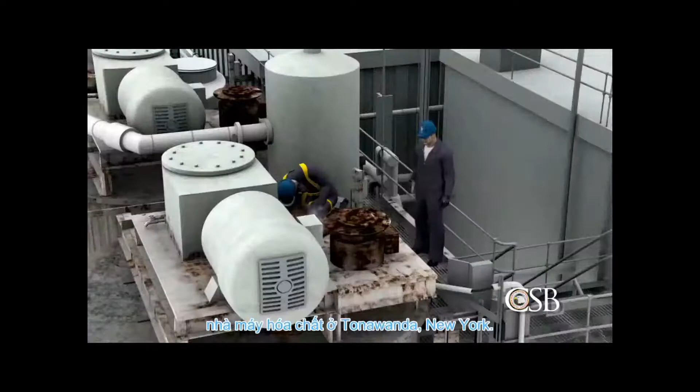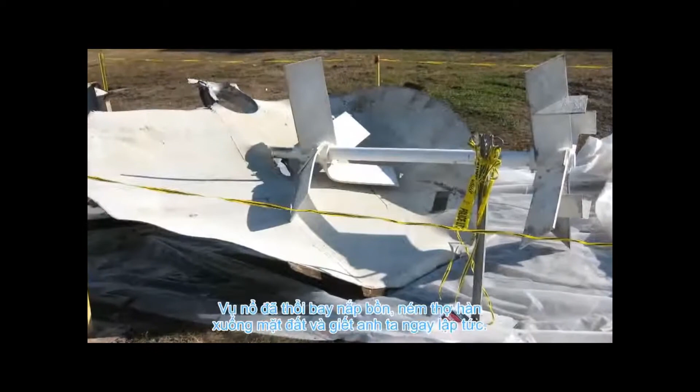On November 9, 2010, a powerful explosion shook the DuPont chemical manufacturing plant in Tonawanda, New York, a suburb of Buffalo. A contract welder was performing maintenance work on a tank that, unknown to him, contained flammable gas. The explosion blew the top off the tank, throwing the welder to the ground and killing him instantly. A second contract worker was burned.

The tragic explosion at the DuPont facility exposed weaknesses in how process hazards were analyzed and controlled. The result was the death of a welder in a preventable hot work accident.

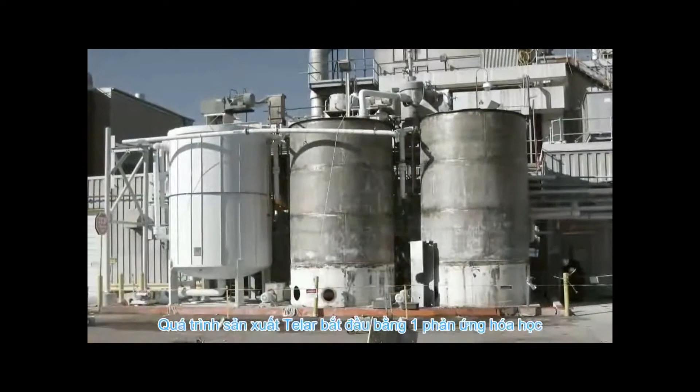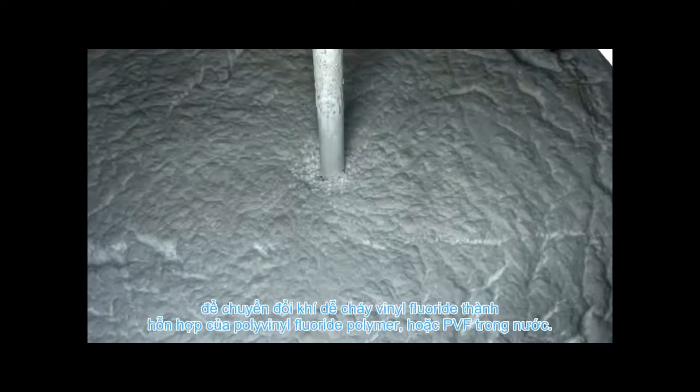DuPont's Tonawanda facility manufactures a polymer known as Tedlar, used in solar panels, and Corian for use in countertops. The process of producing Tedlar began with a chemical reaction to convert flammable vinyl fluoride gas into a slurry of polyvinyl fluoride polymer, or PVF, in water. The PVF slurry then passed through separators.

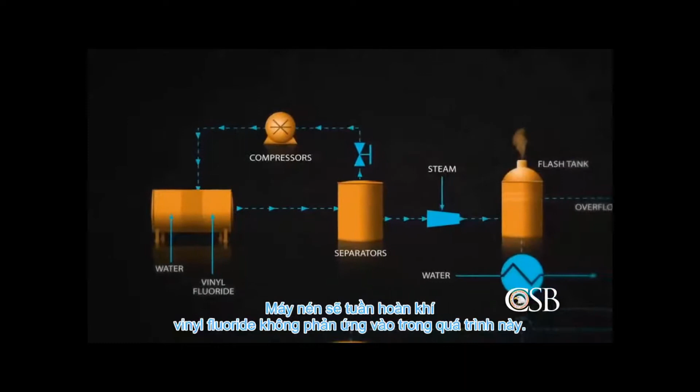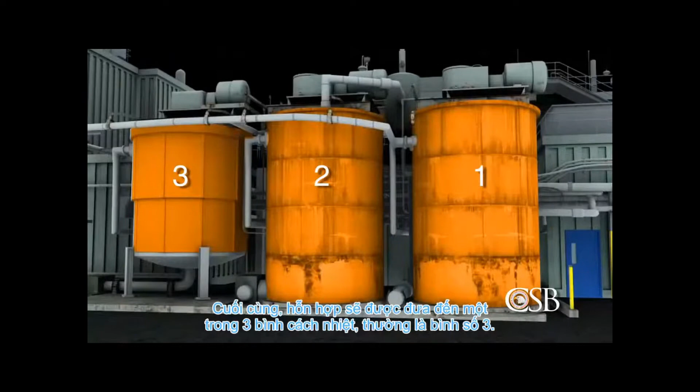Compressors recycled unreacted vinyl fluoride gas into the process, while a small flash tank released residual vinyl fluoride into the atmosphere. Finally, the slurry was transferred to one of 3 insulated holding tanks, usually tank number 3. Tanks 1 and 2 were reserved for slurry overflow. Tank 1 normally remained empty.

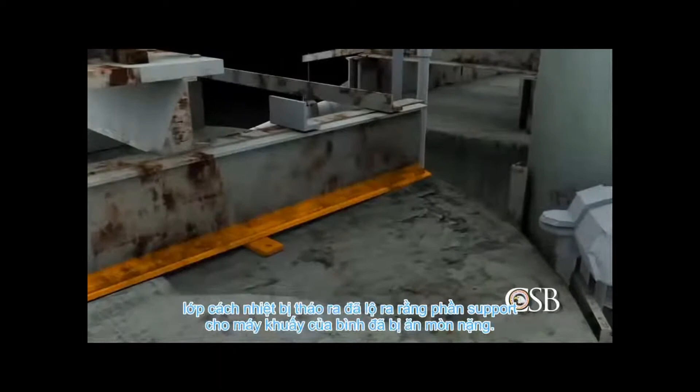On October 22, 2010, the Tedlar process underwent a planned shutdown, during which workers removed the asbestos insulation on tanks 1 and 2. Removing the insulation revealed that the agitator supports for the tanks were heavily corroded. DuPont directed contractors to repair the supports, which would involve welding and grinding on tanks 1 and 2.

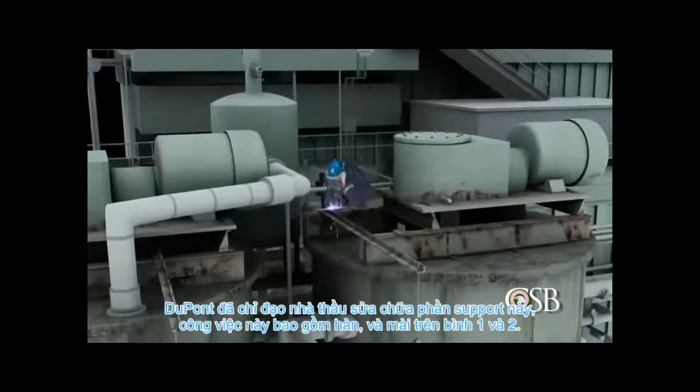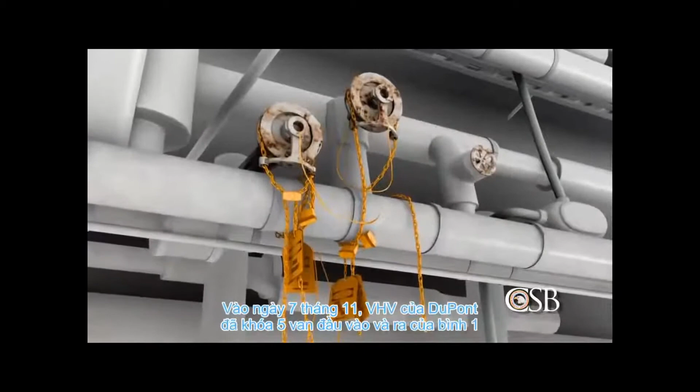The hot work on tank 2 occurred during the shutdown without incident, but the repairs on tank 1 were delayed while parts were ordered. DuPont personnel determined that it would be safe to perform hot work on tank 1 after the restart. On November 7th, DuPont operators locked all 5 valves leading to and from tank 1 in the closed position in order to stop potential slurry flow. The tank's agitator motor was also locked out.

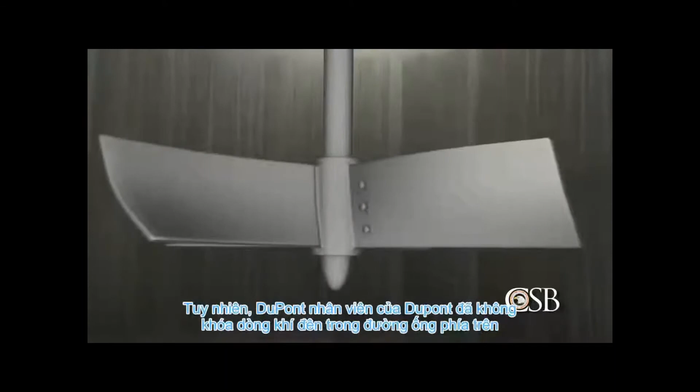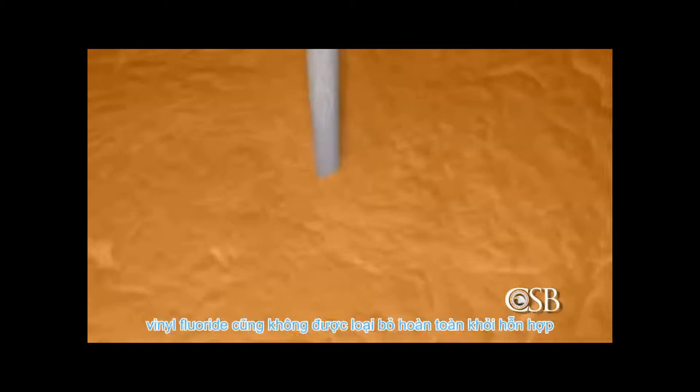However, DuPont personnel did not block the flow of gas inside the overhead piping, or overflow line, that connected the vapor space of all 3 tanks. They mistakenly believed that flammable vinyl fluoride gas could not reach any of the slurry tanks. But the CSB investigation found that even in normal operations, vinyl fluoride was not completely removed from the slurry and was always present in the slurry tanks in varying amounts.

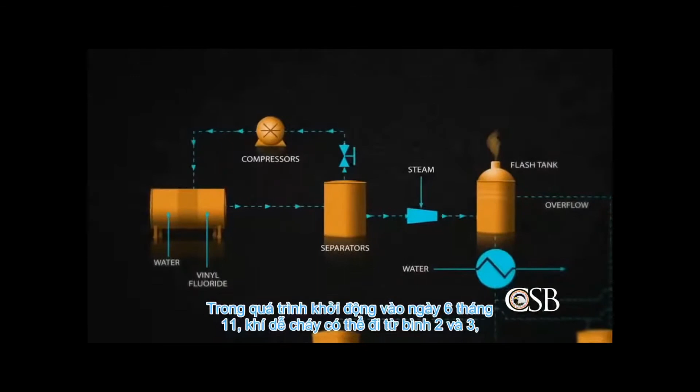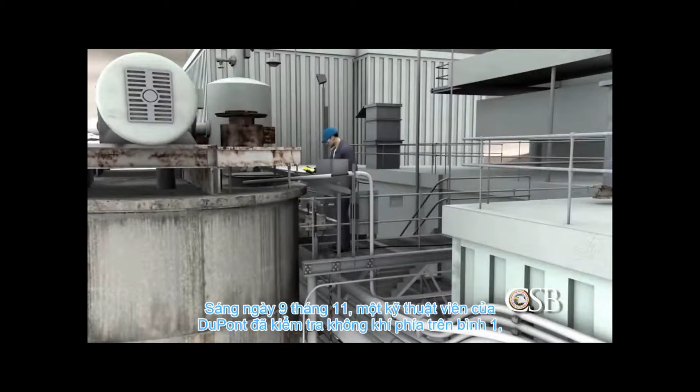When the process restarted on November 6th, the flammable gas was able to travel from tanks 2 and 3 through the open overflow line into tank 1. On the morning of November 9th, a DuPont technician tested the atmosphere above tank 1, where welding would later take place. There were also 2 continuous air monitors in the vicinity. No flammable gas was detected, and the hot work was cleared to begin.

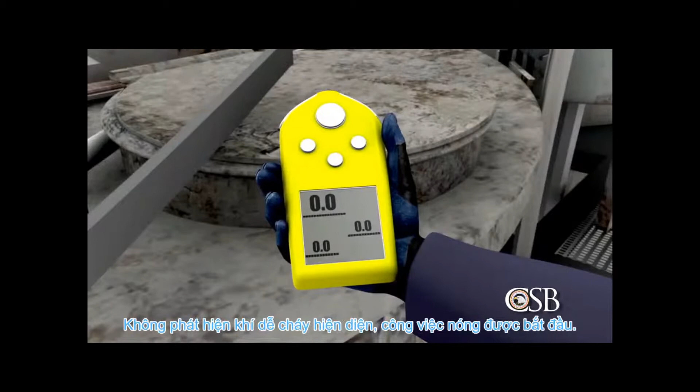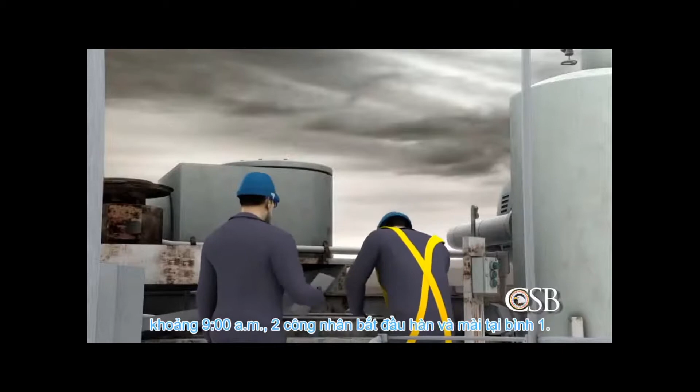But no testing was done to measure or monitor the atmosphere inside the tanks, where, unknown to the contractors, the flammable gas was at dangerous levels. Around 9 a.m., 2 contract workers began welding and grinding on tank 1. The welder connected his safety harness to the tank's agitator support and worked on top of the tank as the foreman looked on from the nearby catwalk.

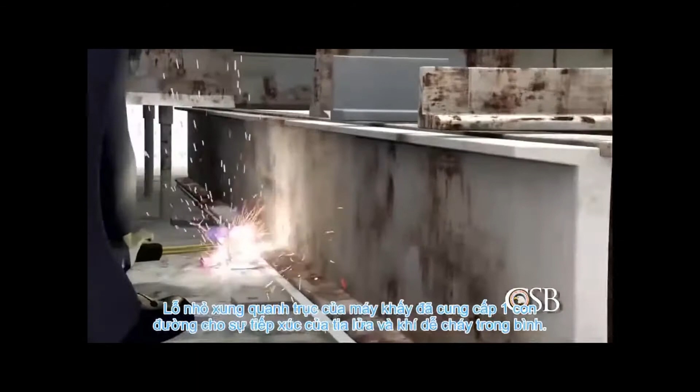At approximately 11 a.m., the welder was repairing corroded portions of the agitator support beams directly above the flammable gas. A hole around the agitator shaft may have provided a pathway for ignition. Welding sparks could fall into the tank, even as flammable gas might drift upward toward the sparks. The ignition of the vinyl fluoride caused a powerful explosion.

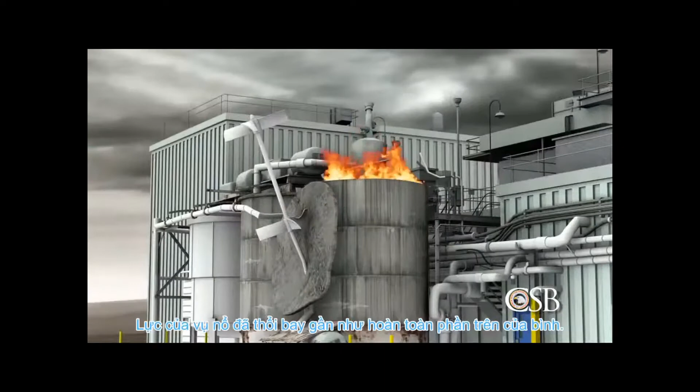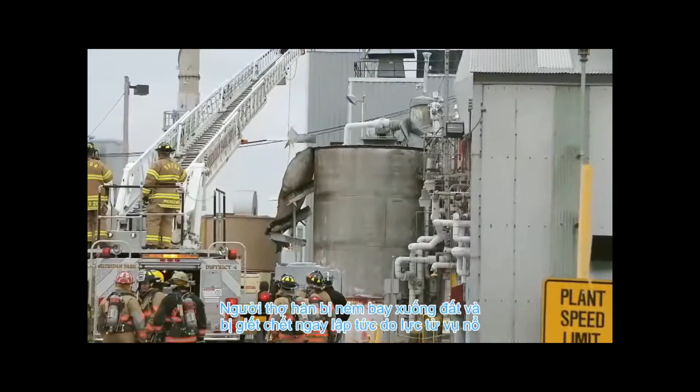The force of the blast blew the top of the tank almost completely off. A flash fire erupted that consumed the flammable gas and quickly burned out. The welder was thrown to the ground, killed instantly from blunt force trauma. The foreman's face and arms were burned.

Mark Wingard was a member of the CSB team that investigated the accident at DuPont. Had DuPont technicians tested Tank 1 for a flammable atmosphere, they would have known that any hot work presented a serious explosion hazard. But plant engineers did not realize that significant amounts of flammable gas could be present in the slurry tanks, and the testing was never done.

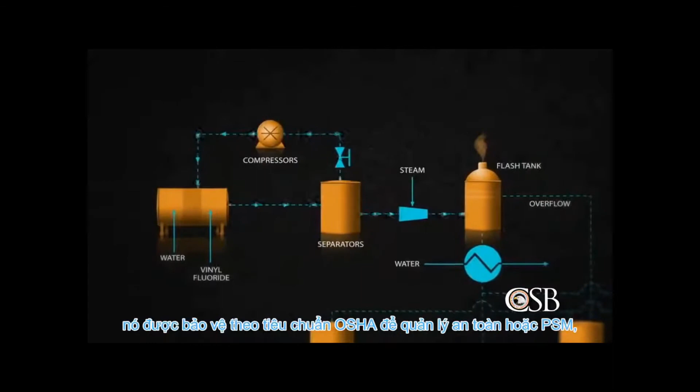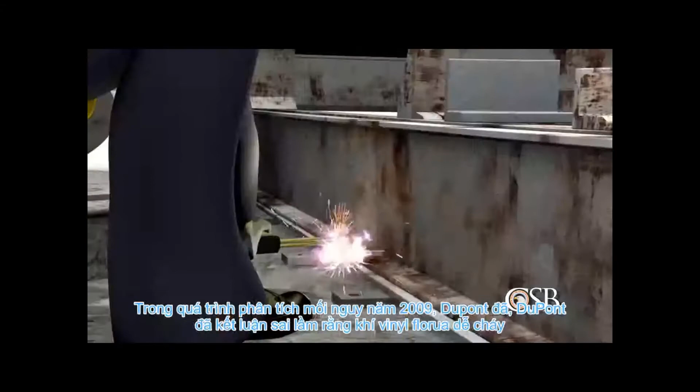DuPont regarded most of the Tedlar production process as covered under the OSHA Standard for Process Safety Management, or PSM, and therefore subject to stricter operating and maintenance requirements. But DuPont personnel did not include the slurry tanks in the facility's PSM program. In a 2009 process hazard analysis, DuPont erroneously concluded that flammable vinyl fluoride gas could never reach the tanks in dangerous quantities.

We found that the contractors did obtain hot work permits for welding on Tank 1, but those permits were authorized by DuPont employees who were unfamiliar with the specific hazards of the process, and the permits did not require testing the atmosphere inside the tanks.

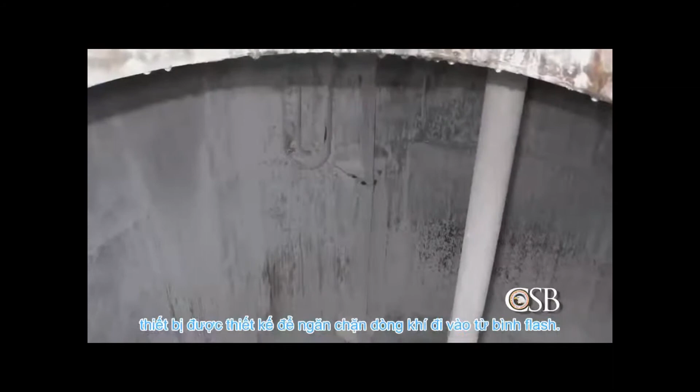Two additional factors may have contributed to the tragedy. Prior to the explosion, DuPont personnel had discovered that slurry tank number 2 had a hole in a liquid trap, which was designed to prevent the flow of gas from the flash tank. Without a liquid seal in the trap, there was an additional pathway for vinyl fluoride gas to flow into the tanks.

However, this hazard went unrecognized, and DuPont engineers concluded that it would be safe to return the tank to service. No formal management of change review was conducted.

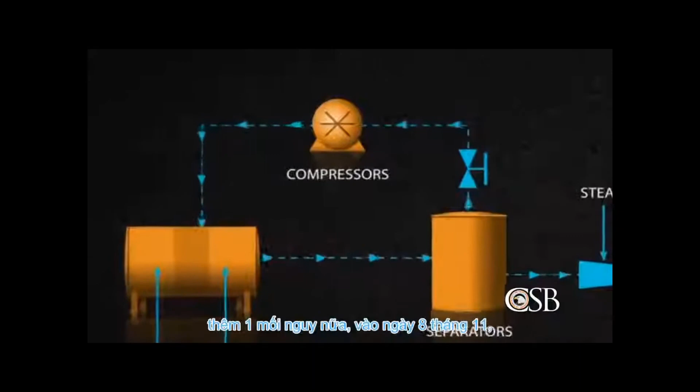Further adding to the danger, on November 8th, there was a malfunction in a compressor used to strip vinyl fluoride gas from the PVF slurry. As a result, the slurry contained more than the normal amount of vinyl fluoride. Once again, DuPont personnel did not formally analyze the safety impact of continuing to operate with a malfunctioning compressor.

In its final report, the CSB recommended that DuPont revise its corporate policies to require atmospheric monitoring inside tanks before and during any hot work. And the board recommended that DuPont require all process piping, including vent lines on tanks, to be positively isolated before authorizing any hot work.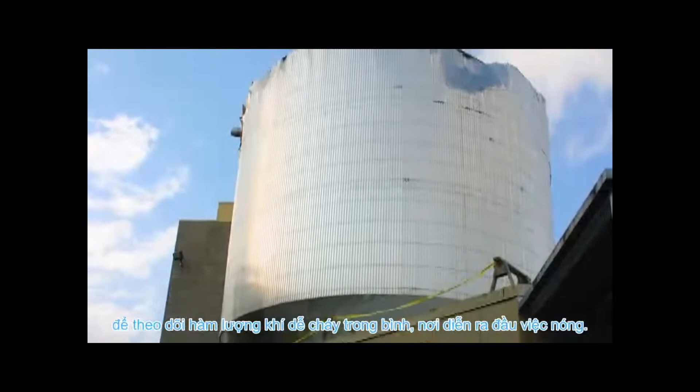In our 2010 Hot Work Bulletin, the CSB identified 11 accidents similar to the one at DuPont. All involved hot work on tanks that ignited flammable gas inside. In all cases, the CSB found that there was not an adequate system in place for monitoring the atmosphere for flammable vapor where hot work was to occur.

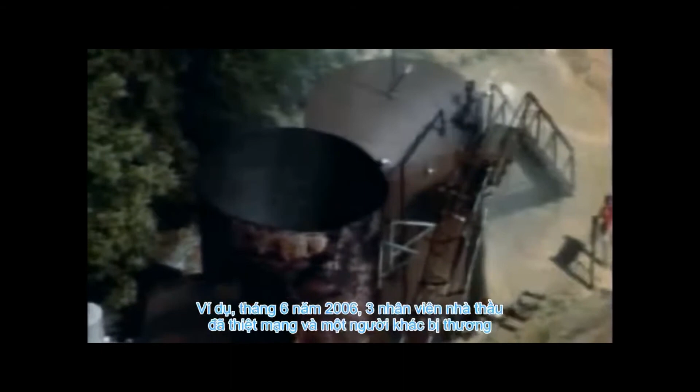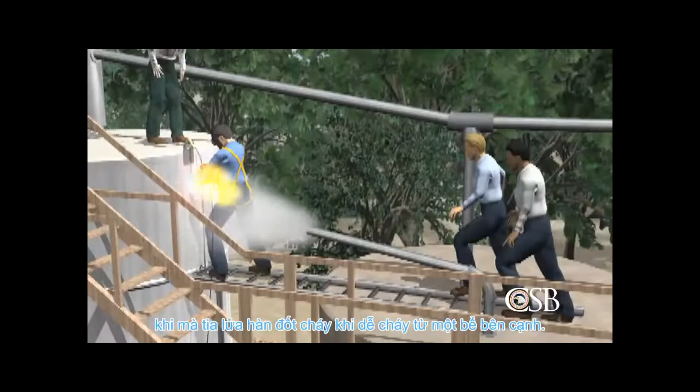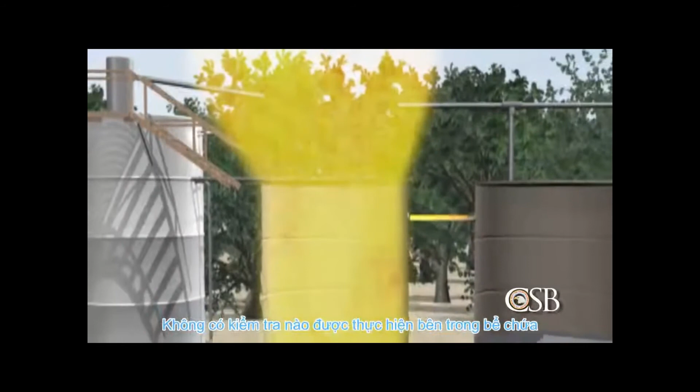For example, in June 2006, 3 contractors were killed and another seriously injured in an explosion at the Partridge-Raines oil field in Raleigh, Mississippi. The contractors were welding on one of 4 storage tanks when welding sparks ignited flammable vapor flowing from an adjacent tank. As was the case at DuPont, no monitoring was performed to test for flammable gas inside the tank, and piping to the adjacent tank was not isolated.

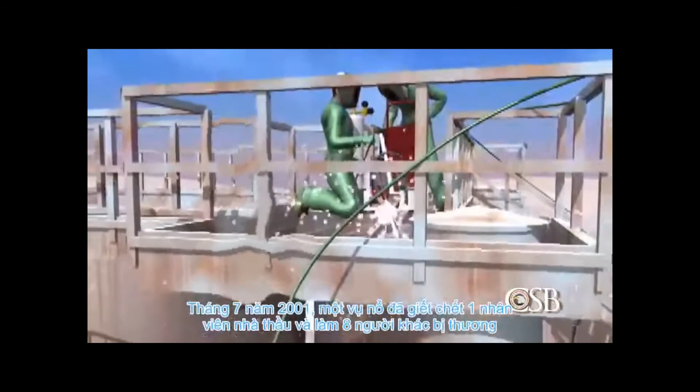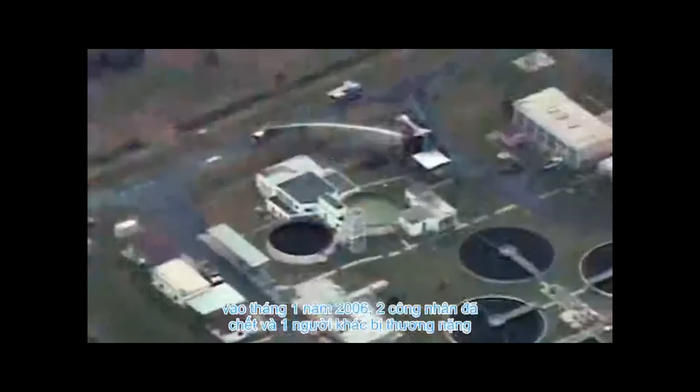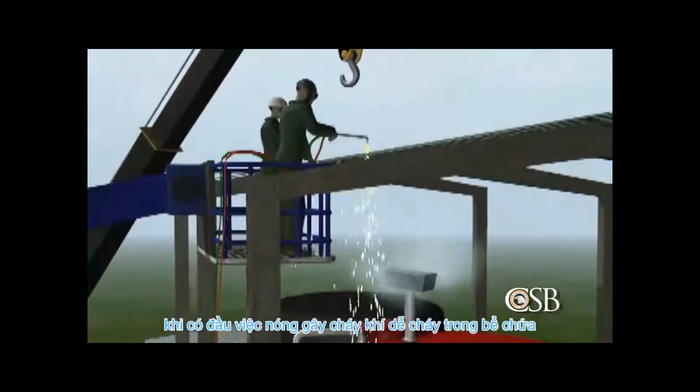In July 2001, an explosion killed 1 contract worker and injured 8 others when welding sparks ignited flammable hydrocarbon vapors in a large sulfuric acid storage tank at Motiva's Delaware City refinery. And in January 2006, 2 workers died and another was seriously injured in an explosion at a municipal wastewater plant in Florida when hot work ignited vapor inside a storage tank of highly flammable methanol. In all of these cases, combustible gas monitoring either was inadequate or wasn't performed at all.

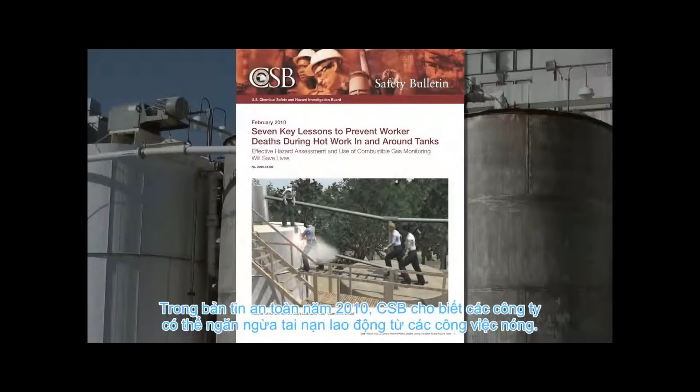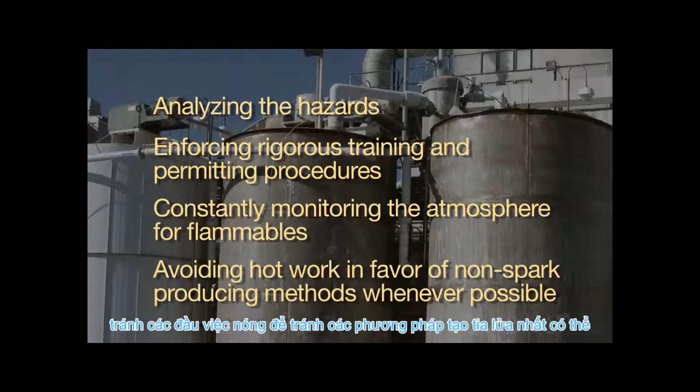In its 2010 safety bulletin, the CSB said companies can prevent hot work accidents by analyzing the hazards, enforcing rigorous training and permitting procedures, constantly monitoring the atmosphere for flammables, and avoiding hot work in favor of non-spark producing methods whenever possible. Hot work is often seen as a routine activity, but it can prove deadly if fire and explosion hazards are overlooked.